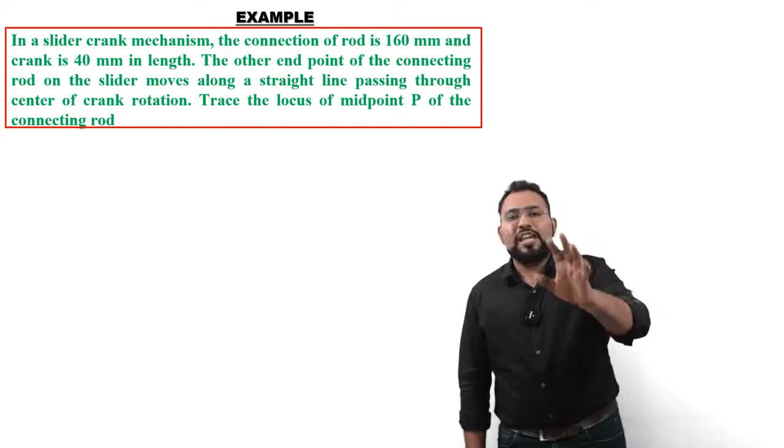Example: in a slider crank mechanism, the connecting rod is 160 mm. Here he has written 'connection of rod,' meaning the connecting rod. So the length of connecting rod is given, which is 160 mm, and the crank is 40 mm in length. So the dimension of crank is given, which is 40 mm.

First write the given data on your sketchbook. Write connecting rod is equal to 160 mm, then write crank is equal to 40 mm.

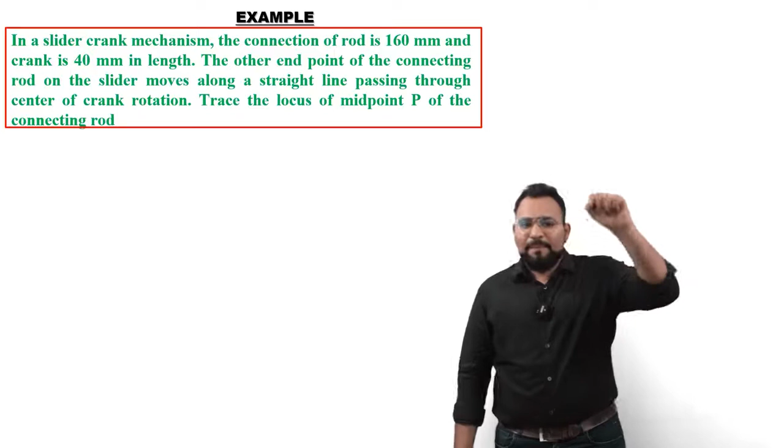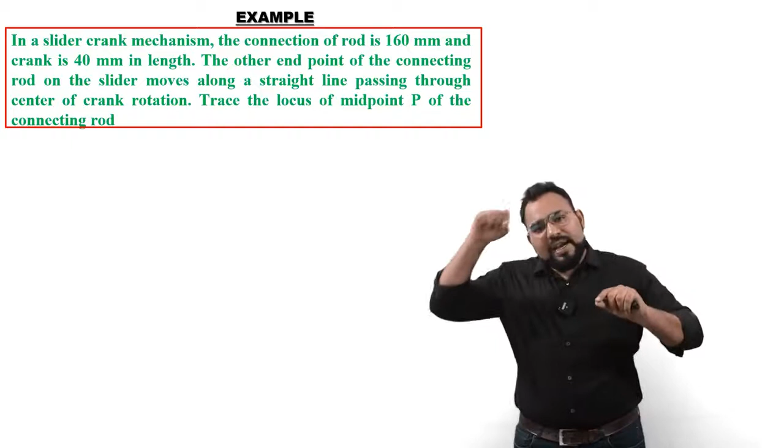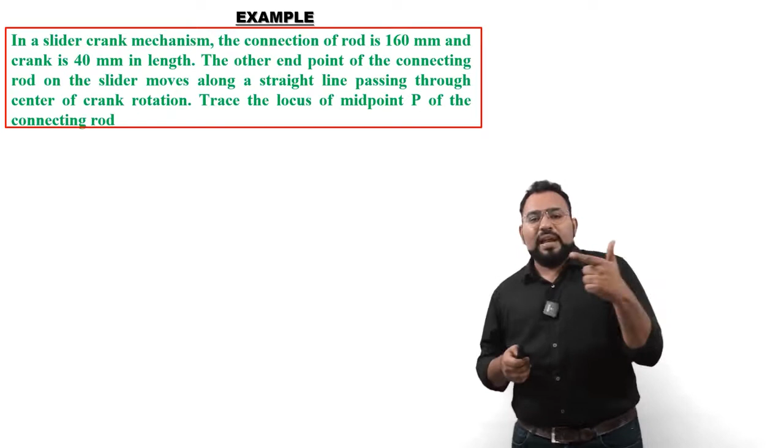The other end point of the connecting rod is on the slider. We know the connecting rod has one end connected to the crank and another end connected to the slider. So the other end point of the connecting rod on the slider moves along the straight line passing through the center of crank rotation. Trace the locus of midpoint P of the connecting rod.

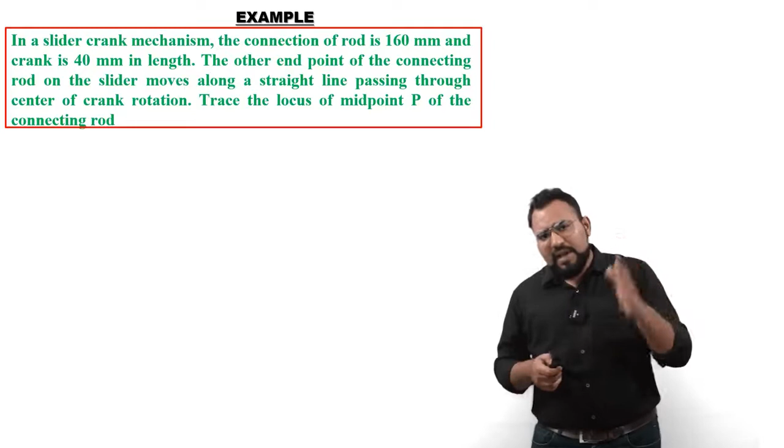Sometimes he will just give you this kind of example without a figure, but in some university papers you can see this kind of example along with a figure. So this kind of figure is also given, so that you get to know what exactly the mechanism is, what type of mechanism it is. So in the example, you have this kind of statement and this kind of figure.

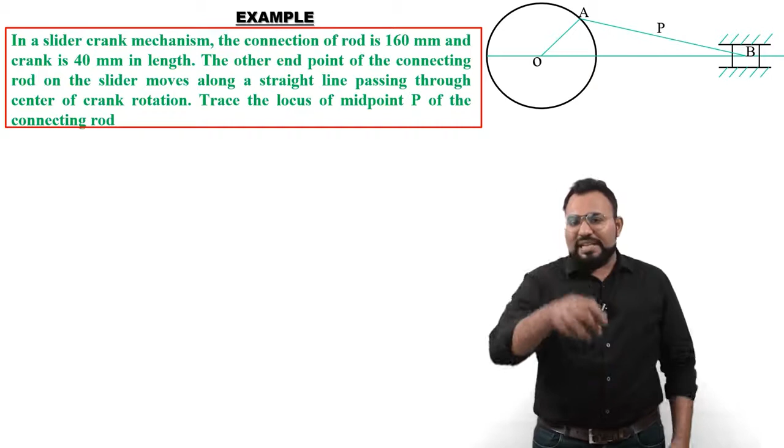So what it's trying to say is that here you can see OA is the crank. First we will define it: OA is the crank, which is doing rotating motion.

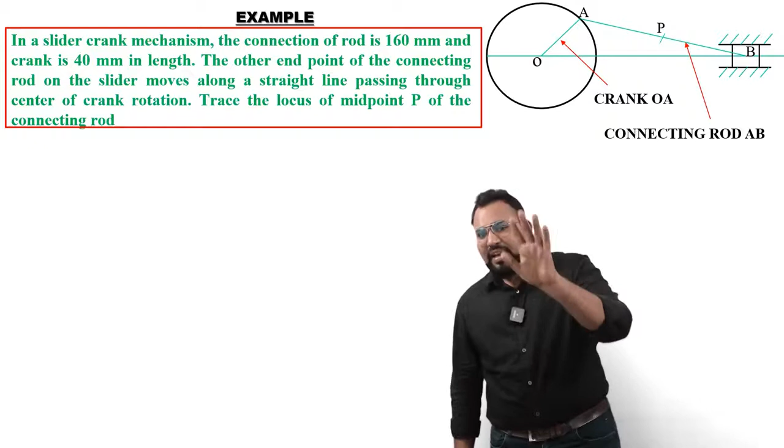Now what is the connecting rod? Here you can see the line AB, which shows the connecting rod AB. So first you have to understand what exactly this mechanism is. The OA is the crank, OA, the AB is connecting rod AB, and you can see the slider.

Where is the slider? You can see point B is written on the slider, and there's some incline line. The incline line shows the fixed position. This shows that the slider is doing sliding motion in a cylinder, and in that cylinder, the slider is doing reciprocating motion.

So you can see the incline line, which shows that there is some fixed thing over there, and inside this the slider is doing reciprocating motion, something like this. So when I'm talking about the slider, you don't have to focus on this incline line. This incline line is just showing some fixed thing.

Let us assume a cylinder over there, and the slider is something like a rectangle shape. Point B is written over there. So assume that the slider is like a rectangle, a square-like thing.

So what is exactly happening over here? There is some cylinder, and the slider is in the cylinder, doing sliding motion in the cylinder. The incline line given shows that there is some fixed thing, and inside this fixed thing the slider is doing a sliding motion.

Now let us solve this example. First we have to draw one circle. Circle of which kind? We know that the crank OA is doing rotating motion.

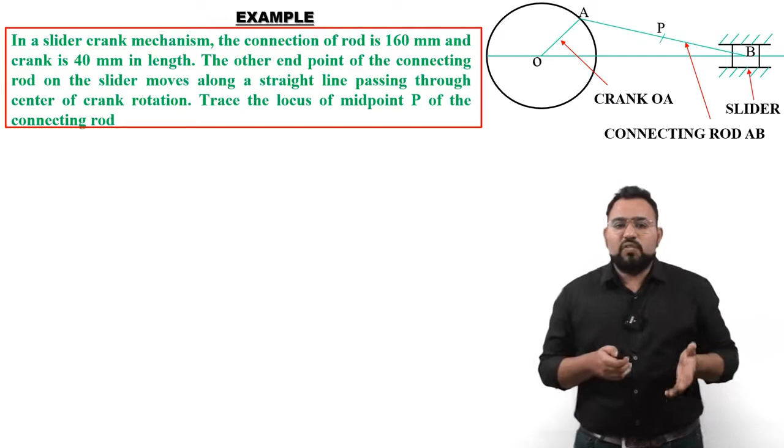So what do we have to do? We have to make the circle's radius equal to the dimension of crank OA. Crank OA is 40 mm, so first we draw a circle of 40 mm, radius equal to 40 mm. So we have drawn this circle having a radius equal to 40 mm, because the dimension of crank OA, which is given, is 40 mm, and we know that the crank is doing rotary motion.

So we have to draw first a circle of radius 40 mm. Now let us divide this circle into 8 equal parts, something like this.

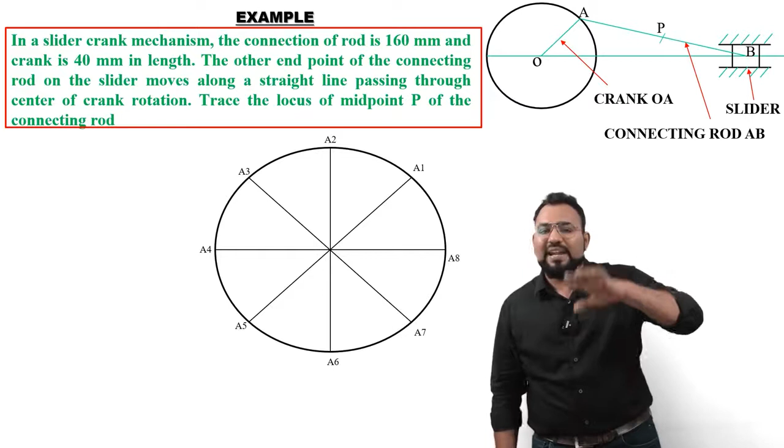Now let us assume that the crank OA is doing a rotation in anti-clockwise direction. So let us give numbering in anti-clockwise direction: A1, A2, A3, A4, A5, A6, A7 and A8, which you can see on your screen.

Now you can see the center of the crank, point O is over there. So point O and the slider center position - you can see the slider center line, point B is written over there, showing the slider center line. So you can see point O and point B both are on the same center line, okay, so that you have to keep in mind.

Now what you have to do? First we will draw a center line through the center of this circle. So let us draw a random horizontal line from the center of this circle, okay.

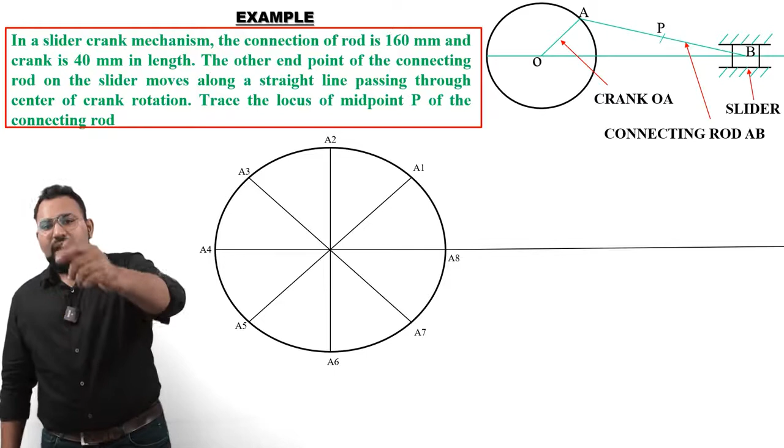Now what we have to do? We have to mark the position of the connecting rod. Here the dimension of connecting rod is given as 160 mm. You can see that one end of the connecting rod is connected to the crank OA, and the other end of the connecting rod is connected to the slider, which is mentioned at point B.

So what you have to do? Now we have to mark the position of the other end of the connecting rod on the center line. As you can see in your first figure, the other end of the connecting rod lies on the center line, which is point B.

From point A1 - when I'm talking about A1, that means there is one particular position of the crank at some time. After some time the crank will move to position A2, then after some time to A3, up to A4, something like this. So let us say right now the crank is at position A1.

So let us mark the other end of the connecting rod on the center line. We know that the dimension of the connecting rod is 160 mm. Take a divider, take a distance equal to 160 mm, with A1 as center on the circle. Put an arc on the center line, and wherever it intersects, that will be your point B1.

Now what we have to do? We have to find the locus of the midpoint of the connecting rod. So A1 B1 is 160 mm, so mark point P1 which is at 80 mm from A1 or 80 mm from B1, because we have to find the locus of the midpoint of the connecting rod. Now we have to do the same procedure at a different position.

So now come to A2. You know the connecting rod is 160 mm, take that distance in your divider, with A2 as center, put an arc on the center line, something like this. Wherever it intersects, that will be point B2, and mark point P2 which is the midpoint - either 80 mm from A2 or 80 mm from B2. This is how you mark point P2.

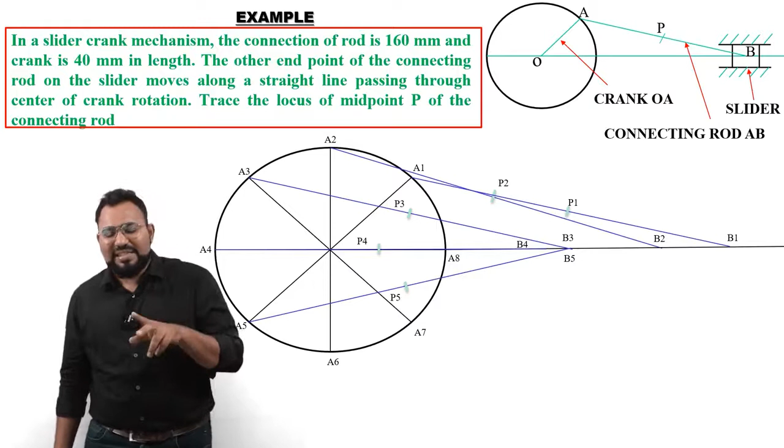Now from point A6, take a distance equal to 160 mm, with A6 as the center, and put an arc on the center line. Wherever it intersects will be point B6. Find the midpoint P6.

Same way, from point A7, take a distance equal to 160 mm, with A7 as the center, and put an arc on the center line. Wherever it intersects will be point B7. Find the midpoint P7.

Now from the last point A8, take a distance equal to 160 mm, with A8 as the center, and put an arc on the center line. Wherever it intersects will be point B8. Find the midpoint P8.

Now we have to find the locus of the midpoint P of the connecting rod. We have the midpoints P1, P2, P3, P4, P5, P6, P7 and P8. So connect all the midpoints from P1 to P2, P3 to P4, up to P8, by a smooth curve, like this. So we have connected all the points P1 through P8 by a smooth curve. This is known as the loci of the midpoint P.

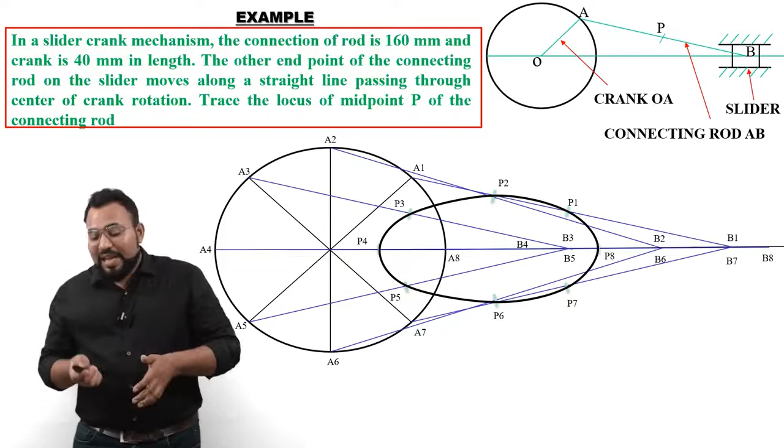So here you can see that by definition there is some mechanism having a constraint, and we have to find the locus of something. Here we have to find the locus of the midpoint of the connecting rod. One locus is point P1 of the connecting rod A1 B1, but it is not only one locus. You can see the connecting rod A2 B2, and there is another midpoint of this connecting rod, point P2. So there are many loci - here, 8 midpoint loci of the connecting rod. If you connect all these loci, since the plural form of locus is loci, that's why this chapter is known as loci of points. Now I think you can understand what the definition is trying to say.

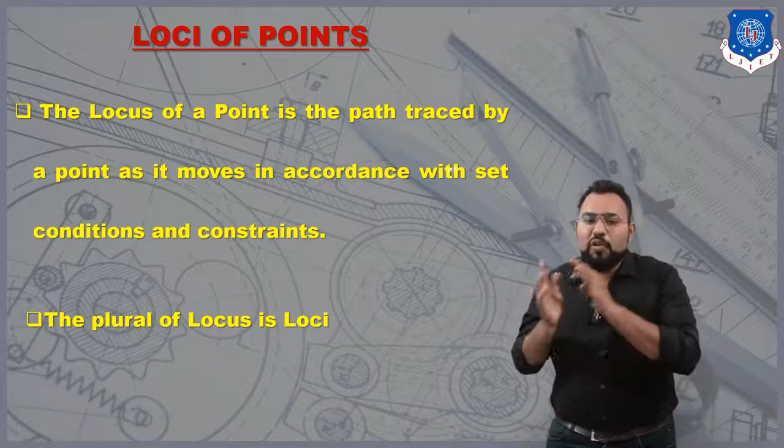Let us again go through the definition. The locus of a point is a path traced by a point as it moves in accordance with a set condition and constraint. Here we have seen the crank and connecting rod mechanism where we have a constraint, because the slider does reciprocating motion only. We found the midpoint of the connecting rod, and since there are many connecting rods, we found their midpoints and connected all these midpoints by a smooth curve. So there are many midpoints, not only one - that's why the plural of locus is called loci, and this is known as the loci of points. I think now you understand exactly what the loci of points means.